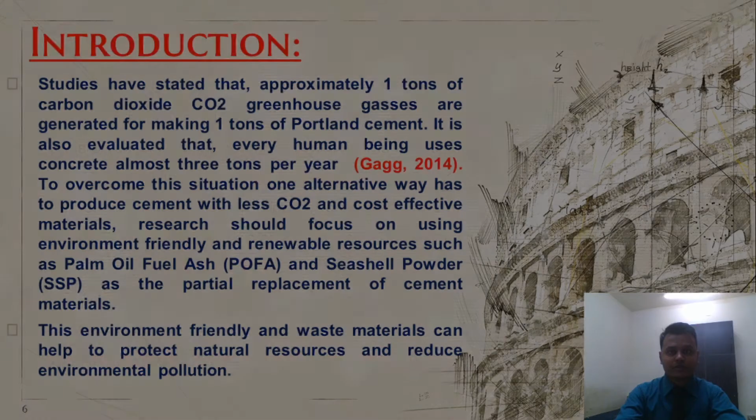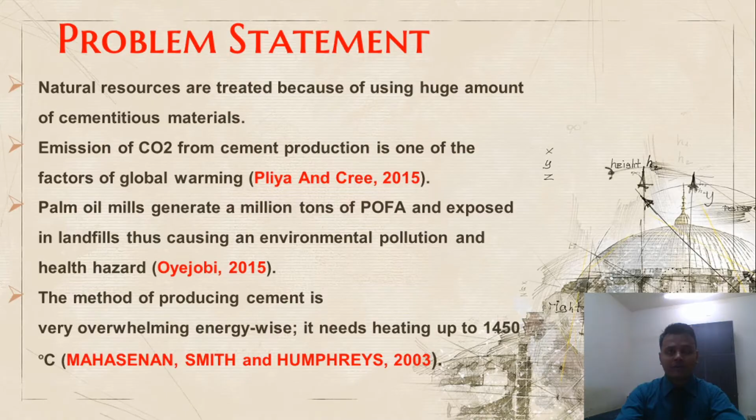Problem statement. Natural resources are depleted because of using huge amounts of cementitious materials. Emission of carbon dioxide from cement production is one of the factors of global warming. Palm oil mills generate millions of tons of POFA, exposed in landfill without utilizing, thus causing environmental pollution and health hazards. The method of producing cement is also very energy-intensive, needing heating up to 1450 degrees Celsius.

Objective. The first research objective is to investigate concrete workability as partial cement replacement using POFA and seashell. The second objective is to investigate the effect of POFA and seashell on concrete mechanical properties as partial cement replacement.

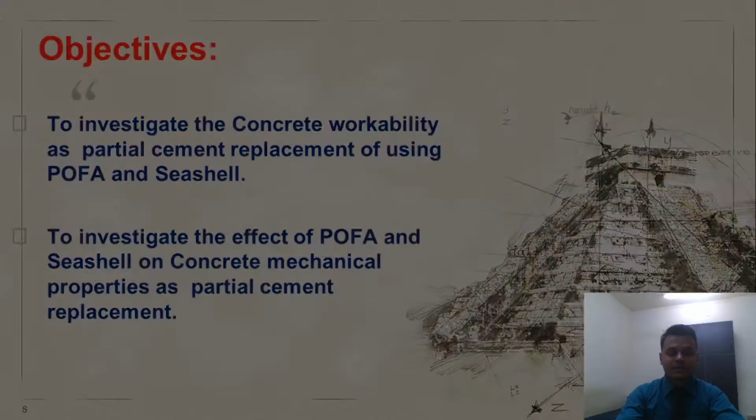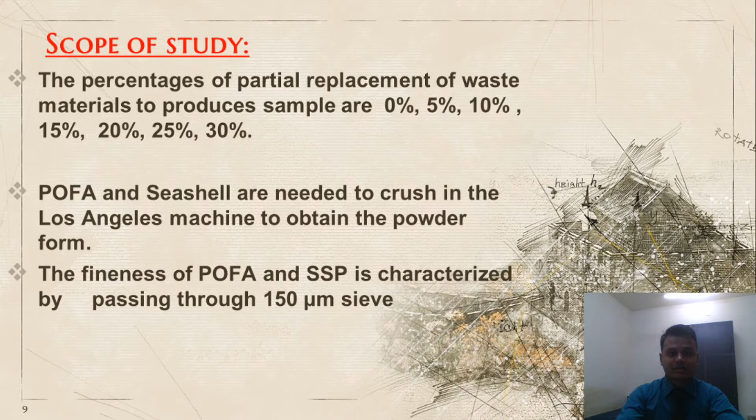Scope of study. The percentage of partial replacement of waste materials to produce samples is 0 to 30%. POFA and seashell need to be crushed in the Los Angeles machine to obtain powder form. The fineness of POFA and seashell is characterized by passing through a 150 micrometer sieve. Applying water curing, the experiment will conduct up to 130 days. We compare the results obtained from samples, and the experiment is applied only in the laboratory, not at a real construction site.

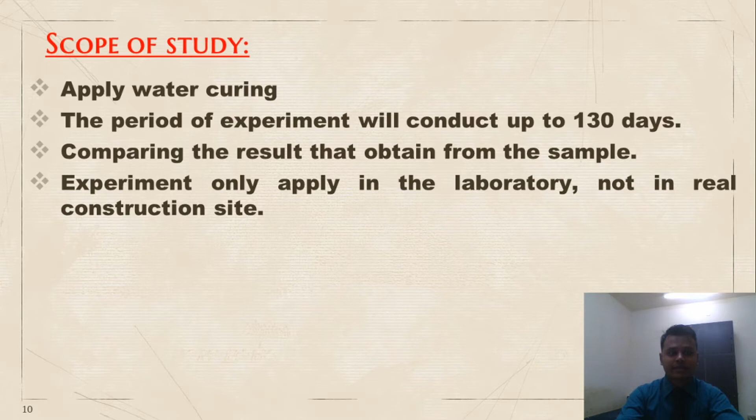Significance of study. The aim of this study is to use waste materials that can reduce cost, reuse post-consumer waste and industry byproducts to produce environmentally friendly concrete. This concrete can improve air quality, minimize solid waste, and lead to sustainable concrete and concrete industry.

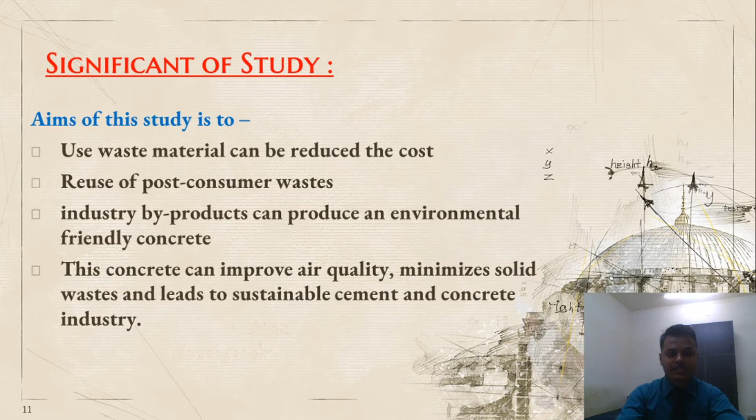Research procedure: experimental work, collecting raw materials, POFA and seashell being crushed, mixing new concrete, preparing samples, doing several experiments, and at last data analysis.

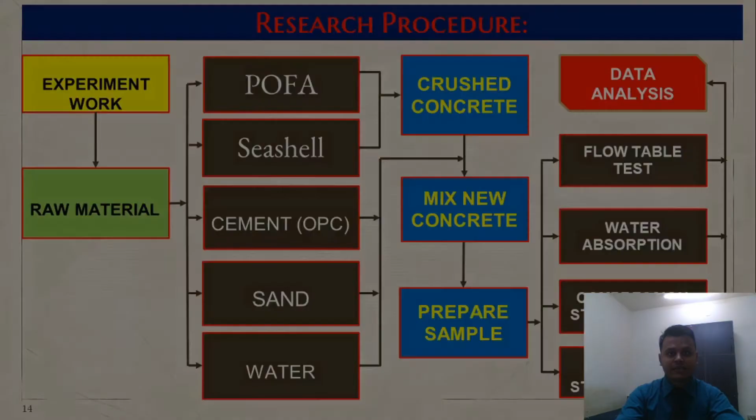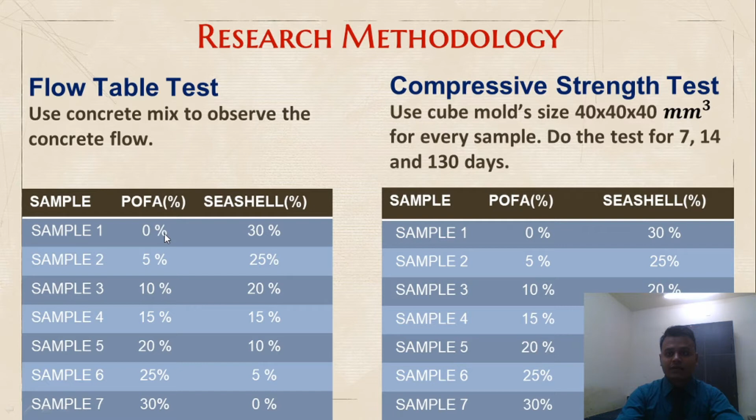Research methodology. For the flow table test, we use concrete mix to observe the concrete flow. Here you can see I used for sample 1 to sample 7 the POFA and seashell 0 to 30%. For compressive strength test, I use cube molds which are 40 by 40 millimeter cube size and do the test for 7, 14 and 130 days.

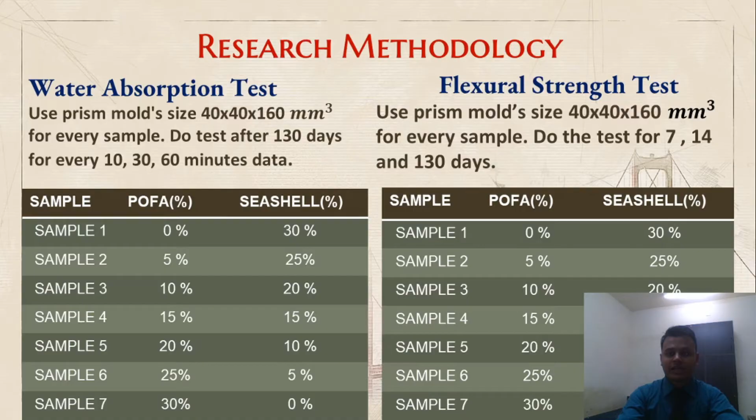For water absorption test, I use prism molds, size 40 by 160 millimeter, and I take the data after 130 days for 10, 30 and 60 minutes. For flexural strength test, I also use prism mold of the same size, taking data for 7, 14 and 130 days. Expected outcomes: reduce cement materials, produce environmentally friendly concrete, reuse waste materials.

For the control mix, compressive strength was obtained as 35.12 Newton per millimeter square at 130 days curing age. So from our experiment, we expect a result more or less than 35.12 Newton per millimeter square.

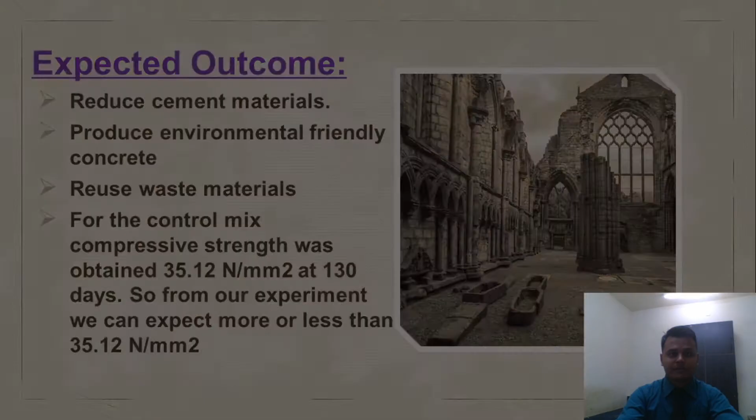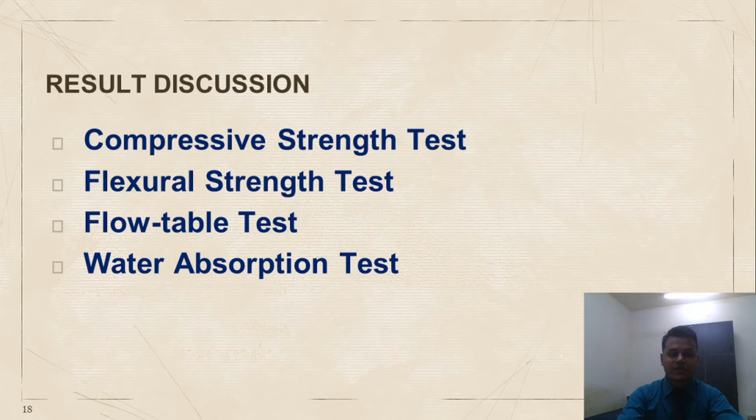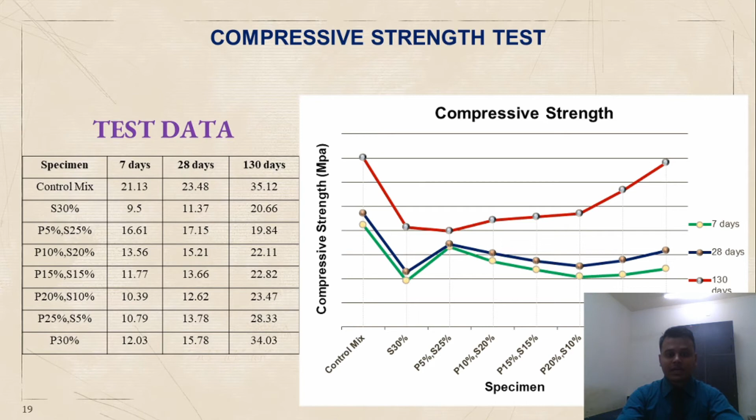Result discussion: we discuss compressive strength test, flexural strength test, flow-table test, and water absorption test results. For compressive strength, here is the graph made from the data. For 7 days and 28 days the data is almost similar, but at 130 days for control mix we get compressive strength of 35.12 megapascal, and for POFA 30% we got 34.03 megapascal.

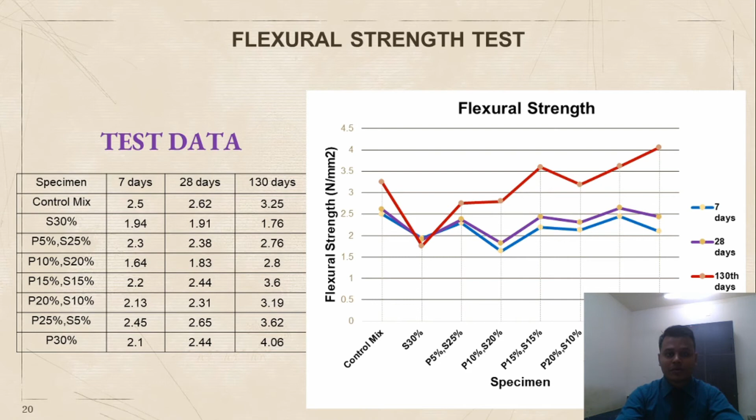For flexural strength test, as before, 7 days and 28 days data is almost similar. But for control mix we get 3.25 megapascal, while the highest flexural strength, 4.06 megapascal, is for POFA 30%. Besides that, we get the lowest flexural strength after 130 days curing age, which is 1.76 megapascal.

For the flow-table test, we see the highest concrete flow with seashell powder 30%, which is 23.5 centimeter, and the lowest concrete flow is 22.2 centimeter.

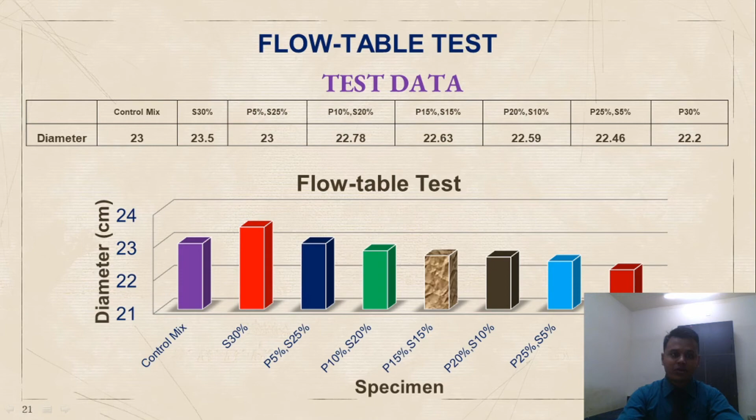For water absorption test, we see POFA 5% and seashell 25% gives the highest water absorption, meaning the sample has less density, which is 8.52%.

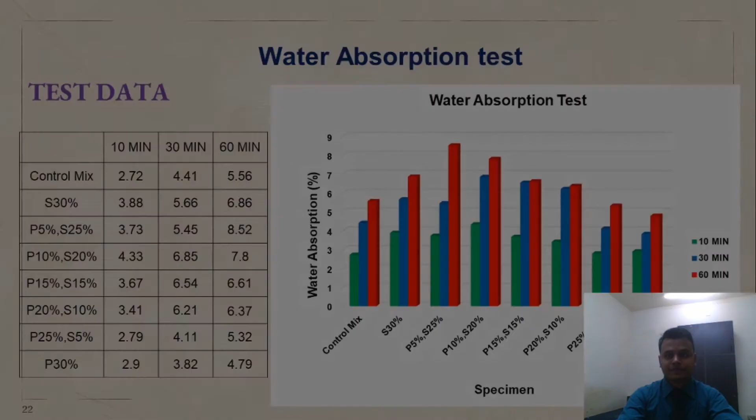Conclusion: from the compressive strength test, 30% POFA has higher and 30% seashell has lower compressive strength. 30% POFA also gives the highest flexural strength, 4.06 megapascal at 130 days curing age, while concrete containing 30% seashell powder decreased the flexural strength from 1.94 to 1.76 megapascal according to curing ages 7, 28, and 130 days.

By analyzing the flow table test, the result obtained from concrete containing 5% POFA and 25% seashell shows relatively similar flow compared to control mix. From the water absorption test results, concrete containing 30% POFA replacement of OPC has the lowest water absorption, indicating the highest density of concrete specimen due to pozzolanic reaction.

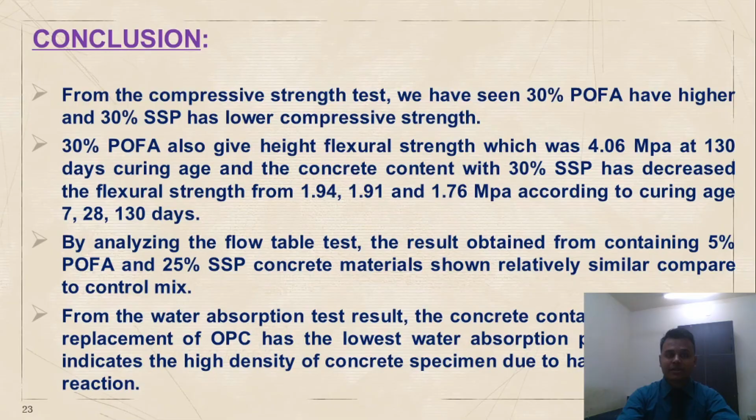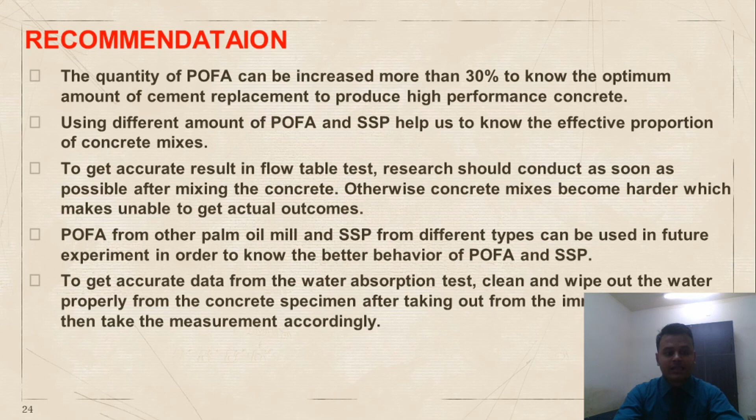Otherwise, concrete mixes become harder, making it unable to get actual outcomes. POFA from other palm oil mills and seashell from different types can be used in future experiments to know the better behavior of POFA and seashell powder. To get accurate data from the water absorption test, clean and wipe out the water properly from the concrete specimen after taking it out from the immersion tank, then take the measurement accordingly.